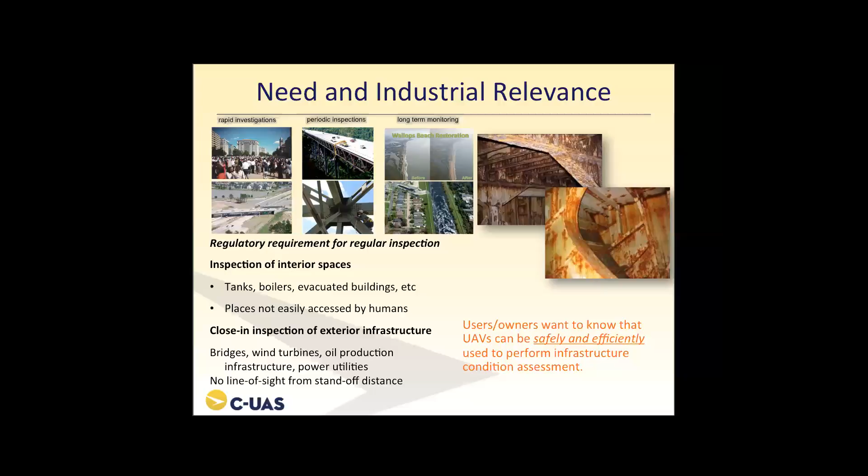And the one that we're focusing on is that the sensors that are actually recording the information that we need to develop and evaluate the condition of infrastructure are also enabled, or they become more effective. And I'll explain that a little bit later in the presentation.

which Dan Stilwell's master's student, Ben Straub, is going to talk about. That's his focus during his master's research, on the indoor, and then also documenting disturbances on the outdoor environment, and how those disturbances influence or how we can deal with those disturbances in a flight control setting.

And so I would say that if we're thinking about the commercial solution, as I emphasized, the commercial solution for this is ultra-reliable unmanned aircraft infrastructure assessment platforms that companies like Stantec or any of the other IAB members would want to offer and sell to this multi-billion-dollar inspection industry in the U.S.

So our technical approach - the equipment that we have is generously provided by Dan Stilwell. He was the one who already had these two unmanned aircraft in his lab and had already been working with them. And so these are the two guys that we're playing with in this project.

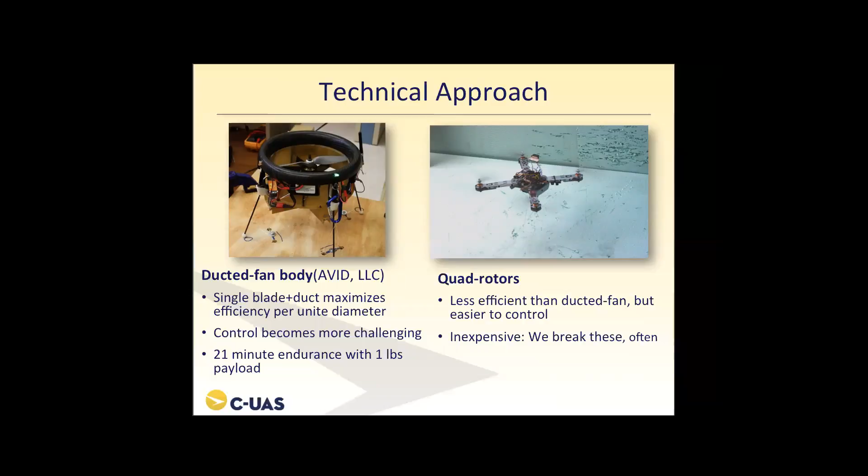Our year one goals are really very simple and straightforward. We want to demonstrate that we can implement robust autopilot with disturbances near a wall or near a ceiling in an opening in an indoor environment, and that we can handle disturbances and hold position at the exterior of a bridge.

So we're going to present first now on Ben Straub's work on the indoor inspection with the ducted fan, and then I'll talk about the plan for the research field excursion to this Wolf Creek Bridge. This is a bridge in Southwest Virginia, where we're going to give our first attempt at some semi-autonomous flight with the quadcopter for the outdoor inspection.

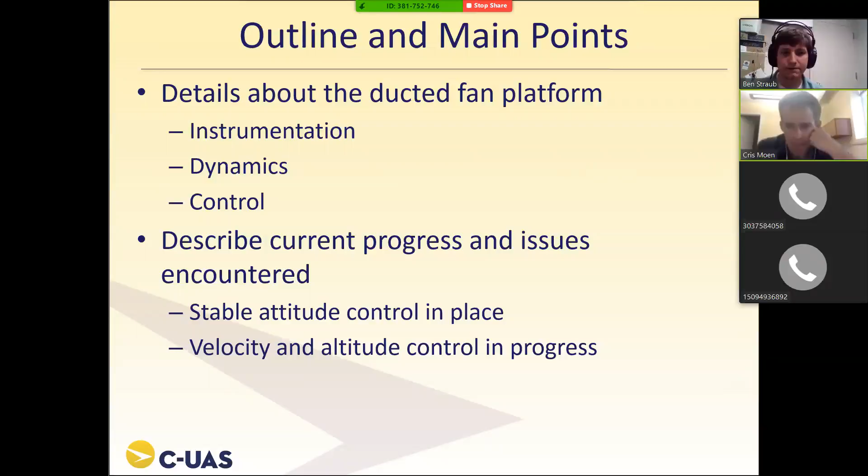So why does this matter? How is this going towards our goal of indoor inspection? The high level steps towards indoor inspection we see are: start out with some kind of orthodox, traditional approach with traditional instrumentation. Then from that, you build on additional instrumentation, maybe proximity sensors or distance sensors to sense a wall, or some kind of sensor that gives us an idea of disturbances around us, or just some stochastic description of our current state. And then from there you build up into the agile control we're envisioning.

And that's what we're trying to really nail down right now with the ducted fan to get working well. We've played around with some of the additional instrumentation, but this is the main focus right now.

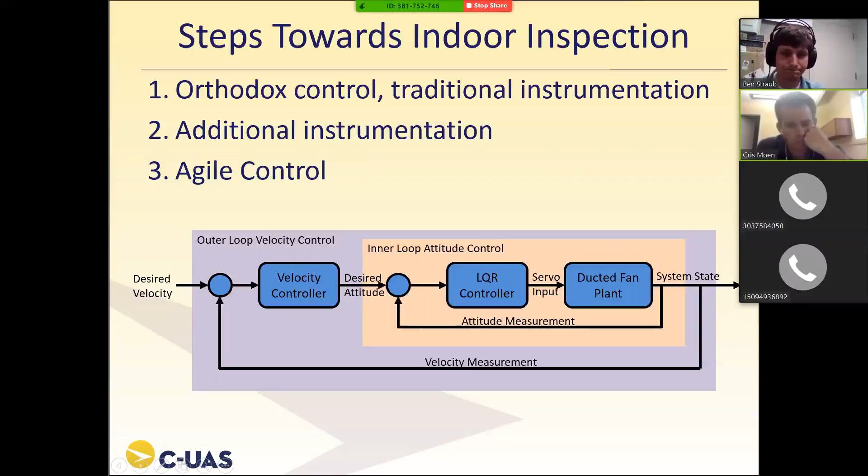So here's the actual ducted fan platform - here's a nice picture of it. The idea is that there's a single propeller or rotor, and then there are four servo flaps underneath that redirect that airflow to maintain the attitude.

Here's a list of the sensors and instrumentation we have on it right now. The main one is the Attitude and Heading Reference System, or AHRS. That measures angular rates, linear acceleration, and magnetic field strength. From those measurements, it'll also give us an estimated attitude and heading.

We have an optical flow sensor that is basically a camera that looks down, and it also has an ultrasonic rangefinder on it to get an altitude measurement. Using that, it'll look from one frame of a picture to another, and estimate a horizontal X and Y velocity, where X and Y are defined in the horizontal plane and Z is down.

We also have some infrared distance sensors - one mounted facing down to give us another altitude estimate, but we can also put others around the edge. We've done some testing with this for sensing walls or obstacles nearby. I've also included the electronic speed controller on this list because we get RPM feedback from that, so it tells us exactly how fast the propeller is spinning.

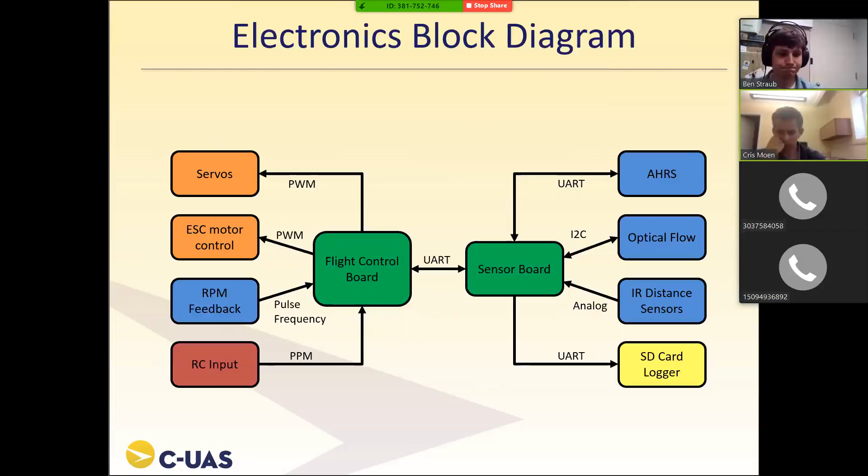Going into some issues we've seen so far, the big one has been issues related to vibration. This is our AHRS sensor, and we've had a lot of issues with it. Internally it has an extended Kalman filter that takes all its measurements and estimates the attitude. This particular brand of AHRS has a proprietary algorithm that attempts to tune the parameters of that EKF, tuning uncertainties and things like that. Turns out it does not behave well under the profile of vibrations we see, and that was causing a lot of issues.

This graph, I recorded while holding the chassis on the ground and then ramping up the propeller. You'd expect the roll, pitch, and yaw to all stay at 0 degrees. But because of the broken tuning issue, you can see the roll in blue drifting off to like 30 degrees or worse. That's pretty bad. Another issue you can see in this graph is the acceleration and angular rates experiencing really high amplitude noise, which is also an issue for control.

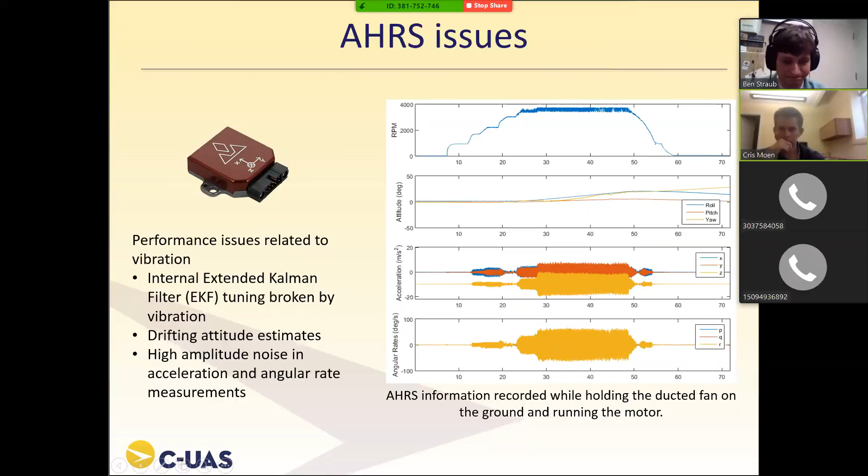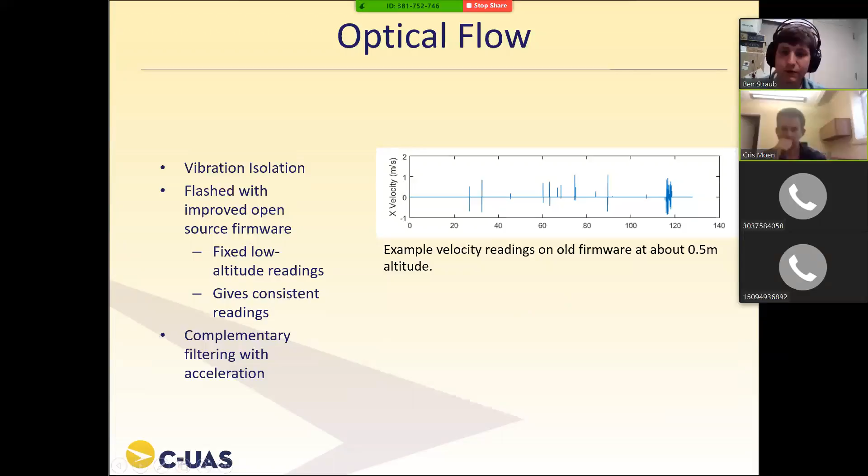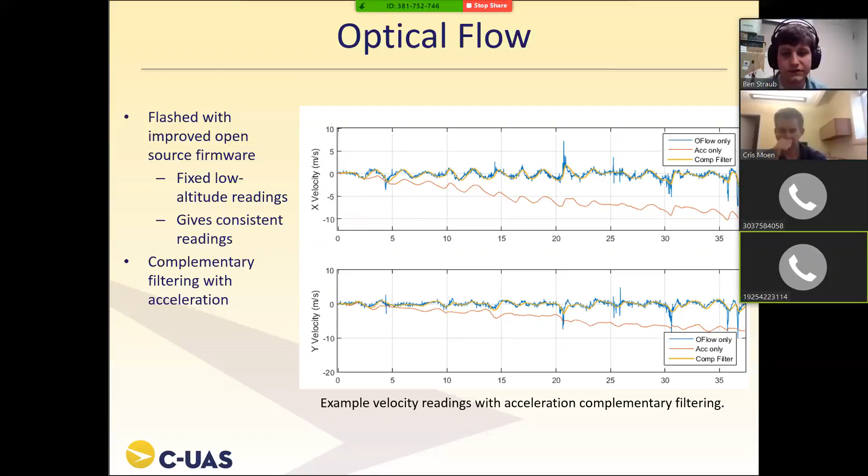We did a similar sort of thing with the altitude. First, we had several different sensors that gave us an estimate of altitude: the IR sensor facing downward, the sonar sensor also facing downward, which gives us a further range but a bit of a noisier estimate, and then we also have a barometer measurement, which is not very accurate but obviously can go much higher - it doesn't have to be pointed at the ground or anything.

So first off, we just combine all three of those based on different thresholds. Each sensor has a certain operating range that it performs best at, at least for the IR and the sonar. Depending on how high we think we are, we weight one more heavily than the other, or sometimes just completely ignore a certain sensor if it's outside of its ideal operating range.

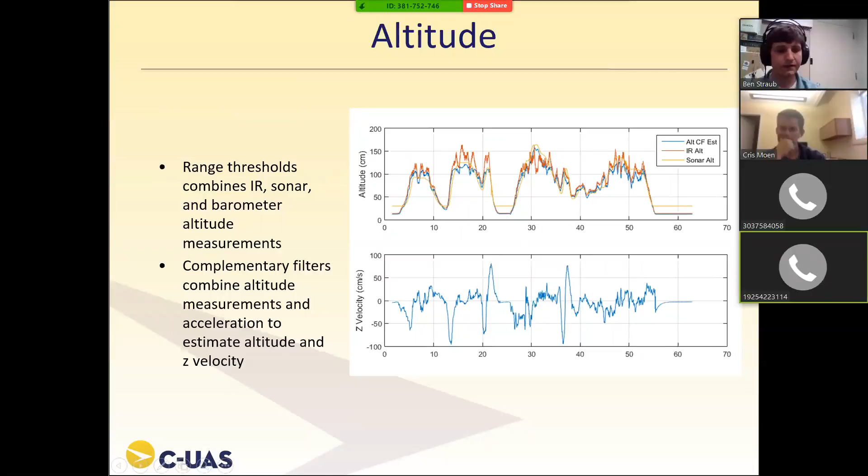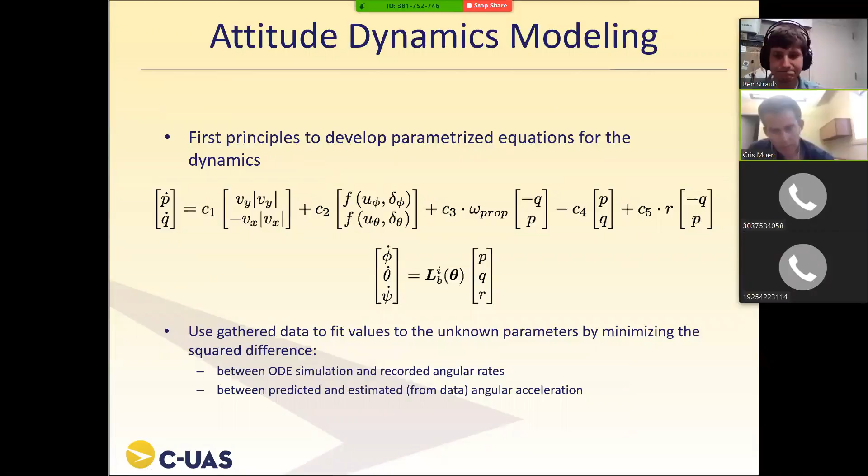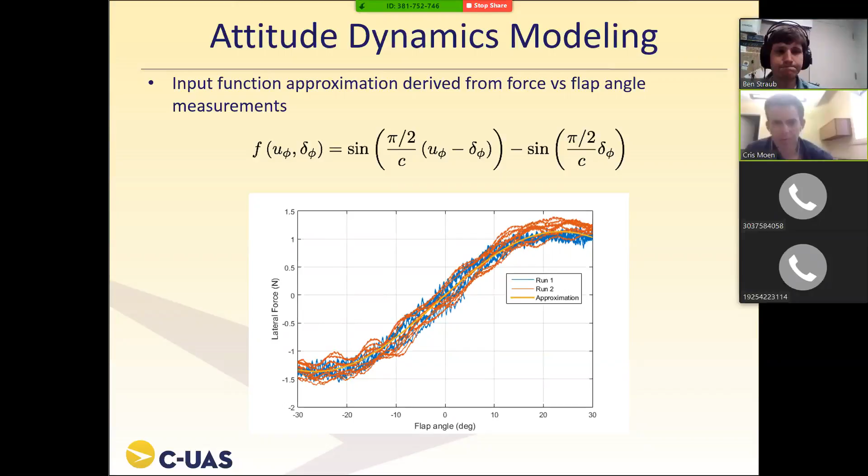I was just trying to figure out, where's that force coming from? Is that the wind force, an external force, or a force generated by the system? So as the motor pushes air through the duct, it hits the servos, it hits the flaps, and if the flaps are at an angle, the air bounces off and causes a force in the other direction. So it's a propulsion force. Okay, got it.

So to come up with a controller for this, the first thing was to linearize the attitude dynamics. The equations I had earlier were nonlinear, so I had to linearize about some equilibrium operating position, which was just upright, hover kind of mode.

Also with that function of input, I went ahead and used the transformed input, treating this whole equation as a new input, V. So when I'm calculating the control values on the controller, it calculates in this transformed space, then does the inverse of that sinusoidal function to transform that back to what the actual servo value should be.

The actual controller design is LQR, linear quadratic regulator. This is a controller design where you give it the linearized dynamics and specify some kind of weighting on how much you value, like weights on the inputs and weights on the states.

If you value roll and pitch more than yaw, you can specify that. After you give it all the weights, it comes up with an optimal controller design that will attempt to minimize those weighted values.

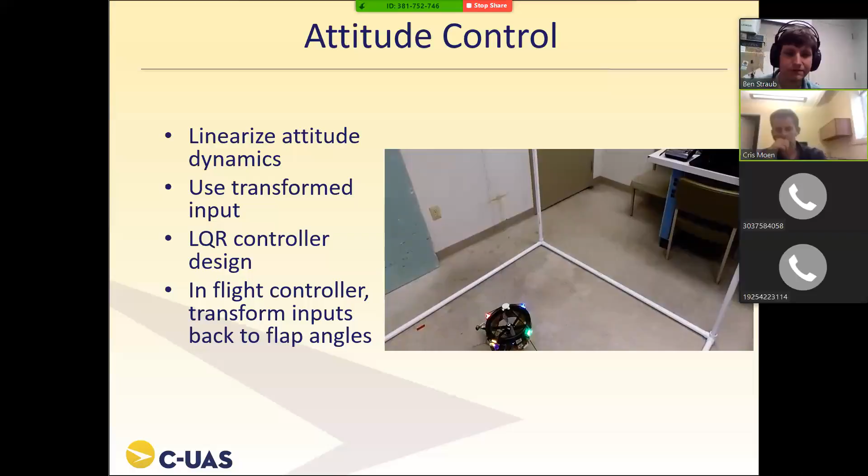I don't have altitude control running here either, and so I'm trying to lift it up off of its tether, like it's tied to a point up towards the ceiling. As I lift it off, once it starts to lift up, I'll try to turn the RPM down a little bit, and then it will kind of fall sometimes. So you'll see some of that too. But all in all, it looks pretty good.

But Ben, the attitude, you said it was attitude control only, right? You were trying to maintain a certain... So yeah, just to maintain zero angle, I guess. Yes, okay, zero. So you want zero angle. Except I was also manually controlling what the desired angle was during that, so if I'm holding left on the joystick, it may be trying to maintain some negative roll angle or something.

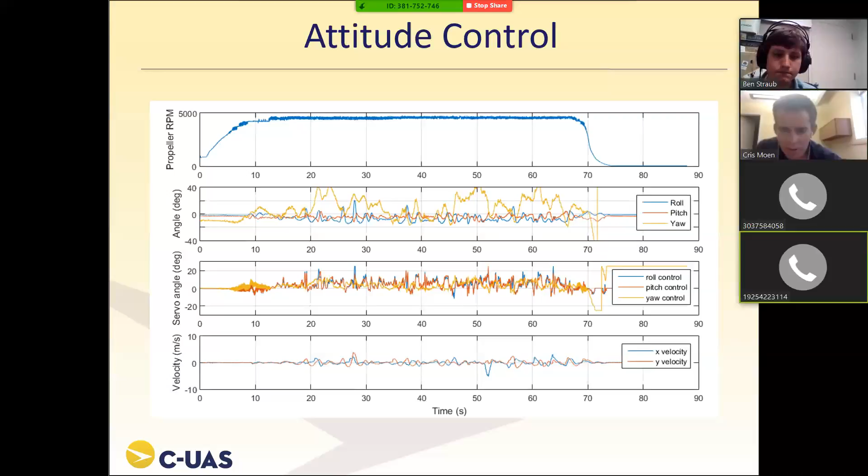Some of the other things I'm working on, I already have - I've shown you the altitude measurements and the filtering estimates of that, so I've got that in working. I've already implemented an outer loop, basic PID control around that to command propeller speed. That's already been implemented and tested a little bit, but it needs more tuning right now because it's just difficult with space constraints. I don't have a lot of wiggle room to move it up and down in a limited space.

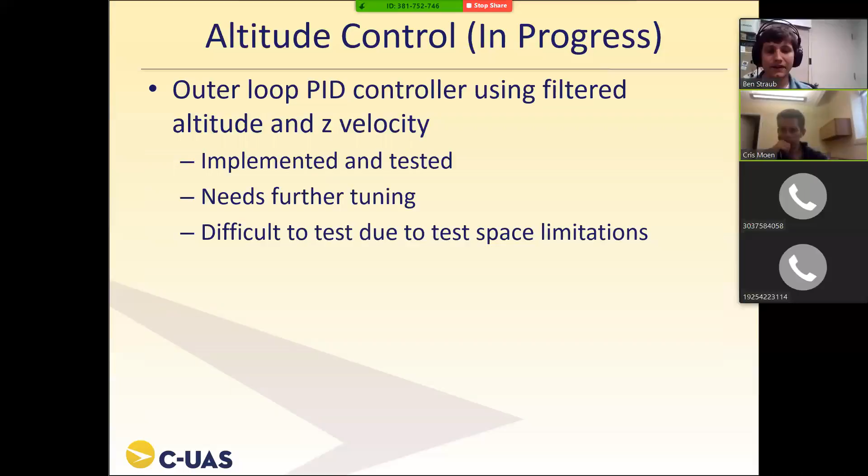Position and velocity control is still in progress. Again, I already have outer loop PID control that will command an attitude to the inner loop, and I'm using those filtered velocity estimates I showed you. Right now it'll kind of maintain its place a little bit, but it's really wiggly, it'll go back and forth. So I think that just needs more tuning.

Ben, how did you address the non-minimum phase from the tilt sensors? It looks like you have the sensors below the CG, right, and you're using linear control methods, but you didn't mention any issues with that. Are you talking about the attitude sensors? Yes. I mean, I haven't had issues with that.

Well, good. Let me put it this way, we have a lot of similar issues to resolve that you seem to be resolving, including the lack of space, and we use professional terms like wiggliness as well.

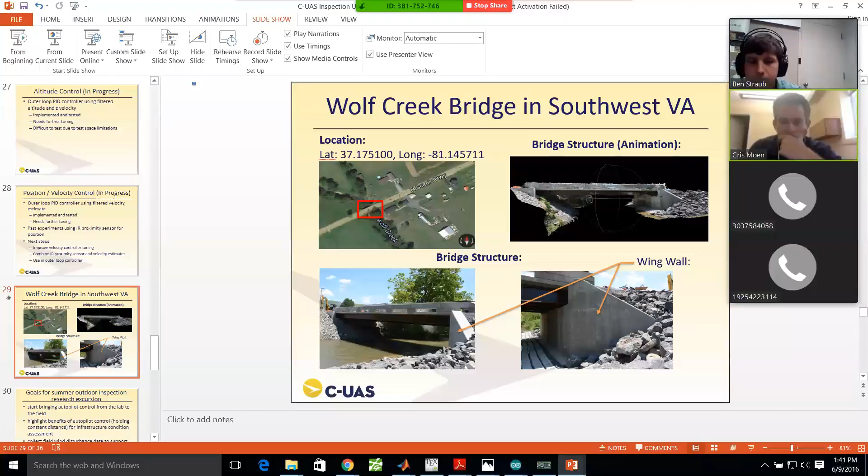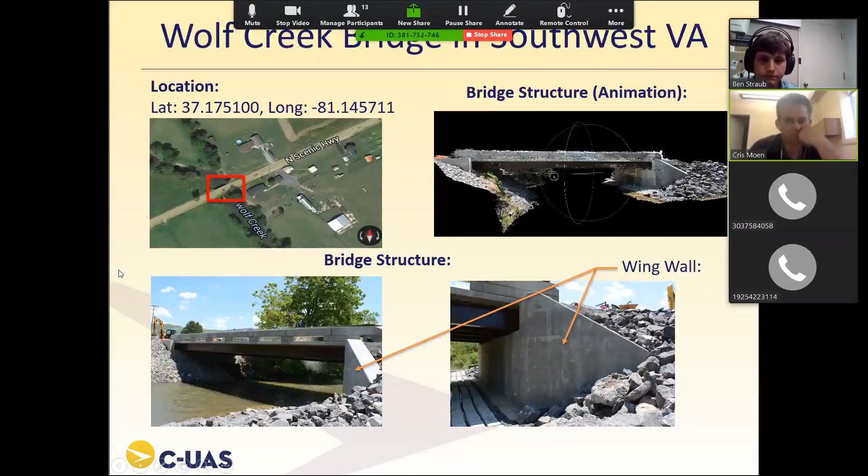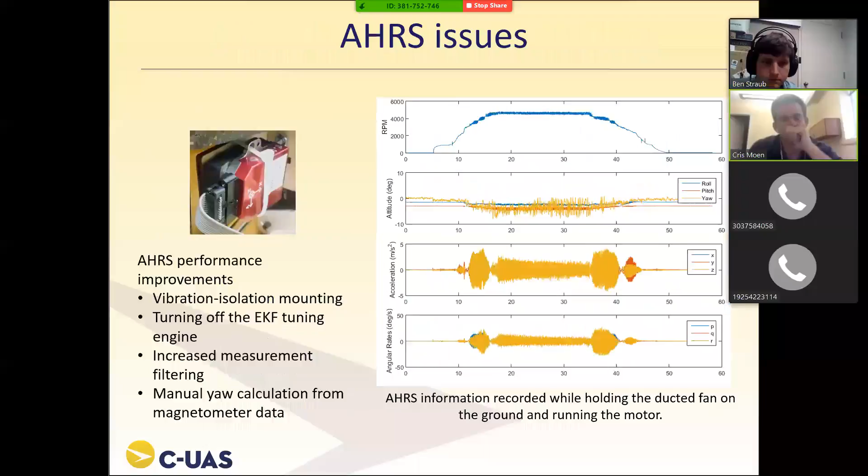When we send staff into a steel box girder to look at welds, we're usually stationary for a while - we crawl through a diaphragm, sit down inside the box, and start inspecting the welds. It seems like that ducted fan, the way it's moving around, I'm not so sure it needs to be flying the whole time. Why can't it fly through the diaphragm or the hole, go in there, sit itself down, and then you have a 360-degree camera mounted on it, or a camera with a gimbal that does 360 degrees and up, down, left and right, and you start scanning the inside of the box from there. Then when you need to look somewhere else, you fly it to another location. So you're using the flight to move yourself through the box, but it may not necessarily need to be flying the whole time, is my point.

Yeah, that may be a good point. You can see this mount in the picture here that we're leaving to mount a camera or something, so it would be pretty easy to put something like a 360-degree camera or a gimbal mount that can spin around. So that's a good point.

To Ryan's point also, in terms of sitting it down at a specific point on the bridge, not necessarily—we're not going to have a floor for this to land on underneath the bridge all the time. One thing I was thinking is that if you could somehow activate a magnet, if you have a steel bridge, this could attach to the web of a girder and run that 360-degree camera, then deactivate that magnet the moment you want to start moving again. So that's just an idea also.

That's a cool idea. Well, Leo, the ducted fan is just for going inside confined spaces, I believe Cris said, and then the quad rotor was for doing bridges. So the ducted fan you're seeing here is only for going inside, and I think you would have a floor. Got it. Okay.

Also, I have a question. Ben, you mentioned you have limited test space right now. Is that going to change for you anytime soon, or why do you have a limited test space? So I've been doing all my flight tests in just like a small office kind of thing—there's nobody working in there, but it's what I have to work with right now. There's another professor here who has said I can use his flight lab. He works upstairs from me, but his flight lab isn't ready yet, so hopefully in the somewhat near future I'll be able to use that test space, and it should be a lot more useful.

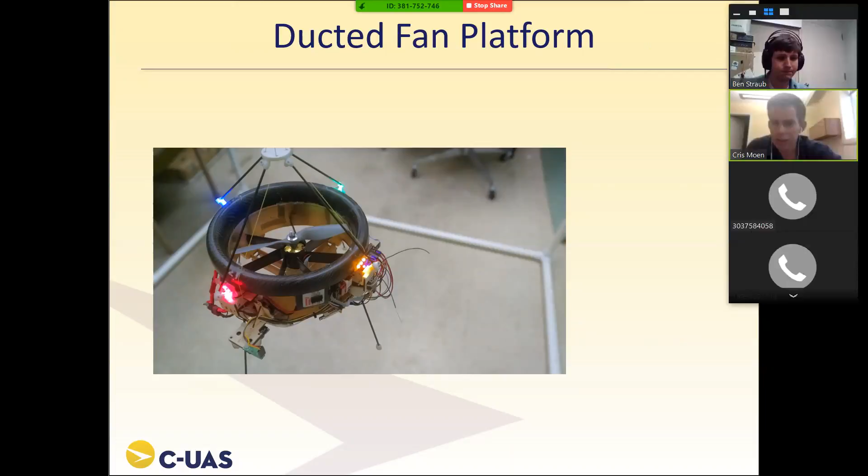Great. Thanks, Ben, that was good stuff. Can you send the host back over to me? I think maybe you're the only one. You just did it? Yes, okay. Yeah, you should be host now. All right, cool. Good job, good job though, that was a good presentation, Ben. Thank you. Yep, thanks.

All right, so you can see that we have a solid team with a lot of expertise in flight control. Definitely a great presentation, Ben. So now what we're trying to do is take some of that out to an actual bridge. We have that bridge, and we're headed out there soon to do some very preliminary—I'm calling it a research excursion—to fly the quadcopter, not Ben's ducted fan, but fly a quadcopter at this bridge and try to measure something.

So we'll do some condition assessment with some autopilot control. This bridge is located in Southwest Virginia. My PhD student and I have worked on it for other reasons, for the Virginia Department of Transportation recently. It was just reconstructed. The cool thing is that it's a pretty rare thing that we get VDOT access to a bridge, and that was the first hurdle that we cleared.

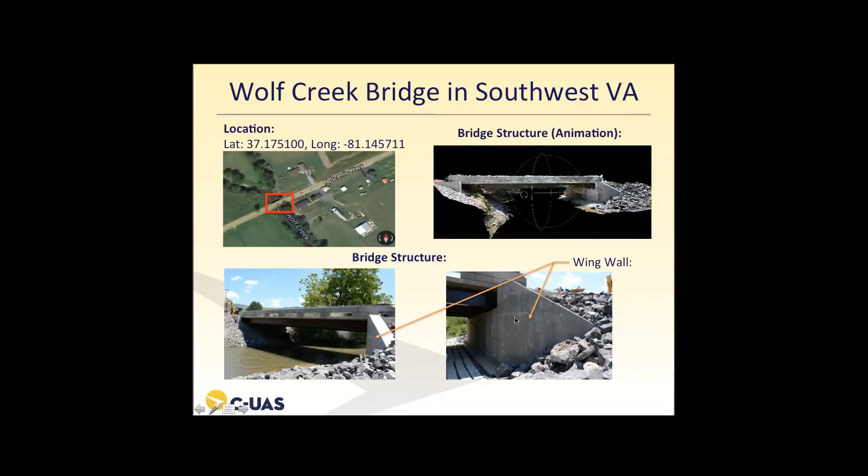Something else I should mention is that the sensor we're going to be flying has the capability to create 3D models of anything, with videos or still images. So when we're flying the unmanned aircraft, we're going to be creating 3D models of portions of this wing wall. That's the integration of the flight control with the sensors.

We have the advantage of DOT interest, and we want to highlight the benefits of autopilot control to them and to the infrastructure community. We also want to collect field wind disturbance data to support our autopilot development, so we're going to be measuring wind speed and direction around the bridge.

We also want to develop relationships, so in this case we're working with the Mid-Atlantic Aviation Partnership to obtain our COA for this project. We wanted to go through the procedure of getting a COA because, at least for me, I'd never done it before.

So it's as simple as this: document the condition of a wing wall with the quadcopter. You'll notice that there are certain features on the wing wall, so we're going to focus on trying to accurately identify and measure a few of these features.

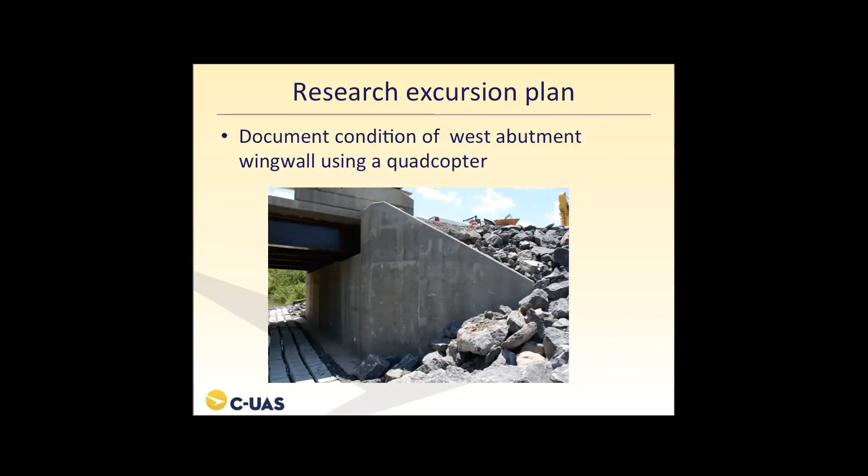So the quadcopter we're using will have GPS and the IR proximity sensor integrated with the autopilot control. We're also installing some Raspberry Pi ribbon camera sensors, 5 megapixel video sensors, that will be collecting the data we can use for measuring the features we're looking at on the wing wall.

I want to emphasize something important. We're trying to keep the experiment simple, but overall, from what I'm seeing in the bridge inspection community using unmanned aircraft, the proximity they can get to the actual bridge is still pretty far, up to 7-8 meters.

The problem with that is they can't get the resolution and detail they want. They want to look for cracks, rust, corrosion, and weird buckling, and it's hard to do that when you're 7 meters away. So a big advantage of this autopilot control is being able to get closer, and that's one of our focuses, to do much better than 7 meters on this wing wall.

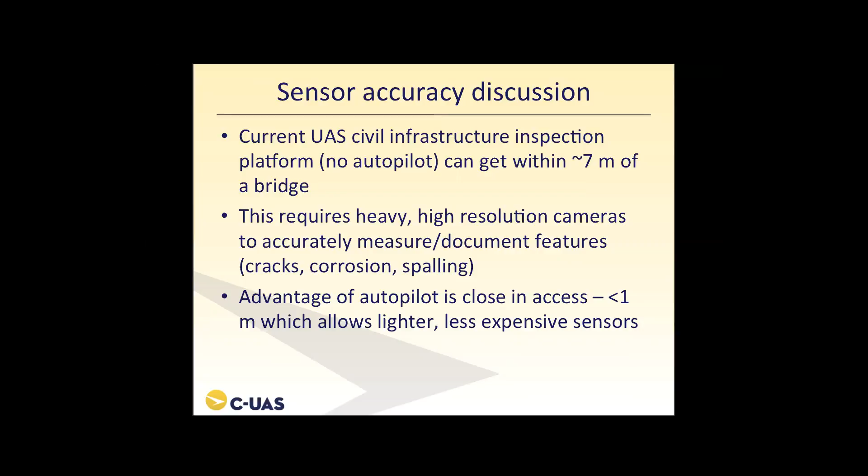I put this in the slide, but maybe we don't need to go over it. It's obvious: if you get closer with the same number of pixels, you have more accuracy in the characterization if you're trying to measure something.

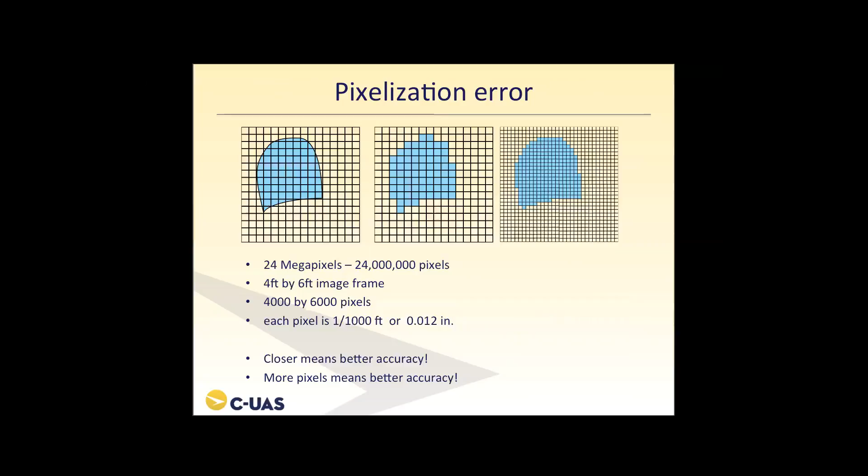But that's why we have the support of the IAB and funds for this project, to start getting out there.

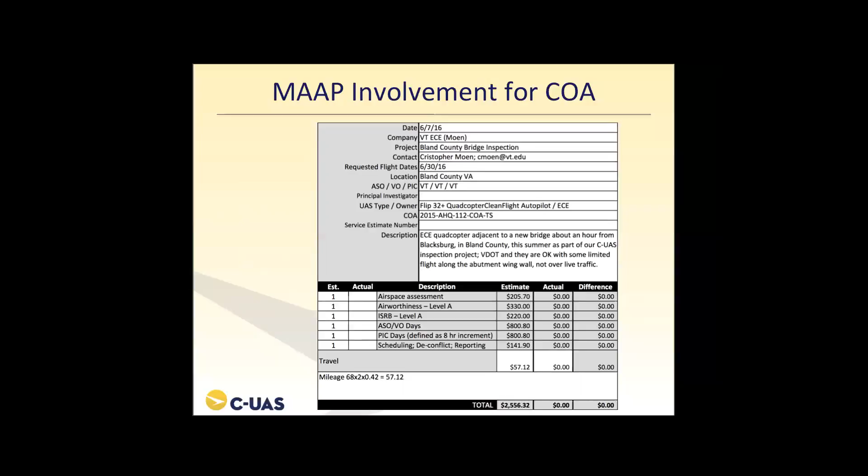The field study is that we're going to be measuring wind speed and direction at a few different locations, thinking about how it varies along the height, identifying 2 or 3 features on the wing wall, carefully documenting those feature characteristics and dimensions, then setting the unmanned aircraft with the GPS location and recording video of the features, along with everything Ben was talking about that it can grab while flying, and also using the IR proximity sensor, setting it like 1 meter from the wall and letting it hold itself there.

We'll take some sensor measurements and evaluate the accuracy of the features one by one. We're looking at this circular feature and this crack, and maybe there's a crack here and something else there. So we're trying to cover a lot of ground: measuring wind and wind disturbance, evaluating flight control with GPS and the proximity sensor, and understanding the influence of all of that on the accuracy of the measurements we want to make for the inspection.

Post-processing, wind models, variation of disturbances along the height, digital state models of the wing wall, and documenting dimensional accuracy, then evaluating stability accuracy of the different autopilot GPS hold and IR proximity hold.

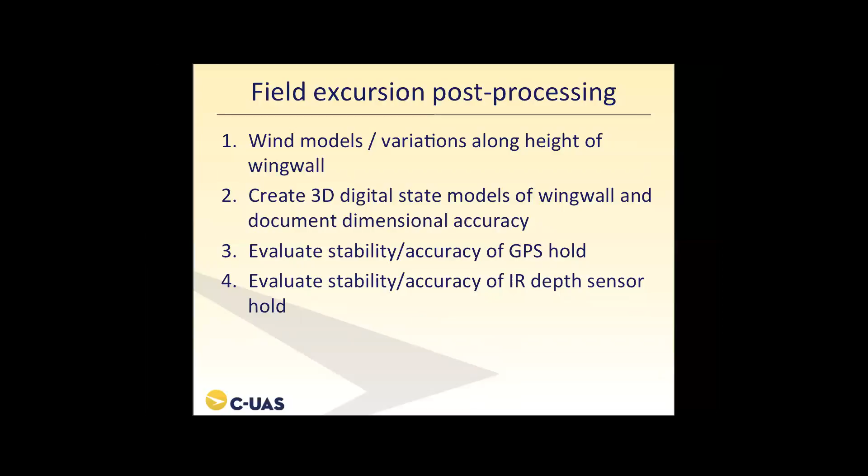The year one deliverables for this project show a lot of progress. We're ready to crank here in the next month to gather outdoor data, and we'll have Ben's thesis advancing indoor autopilot, while the outdoor work will be recorded in a Transportation Research Board paper. This is a conference of 15,000 bridge and infrastructure engineers that come together every January.

In Washington, D.C., this work will be presented there. The third thing we'll be working on in the last half of this year is the wind models. We're going to have a bunch of wind data, and we want to work with Meyer and Craig Woolsey to think about how we can use those wind models to fine-tune the autopilots.

Looking to next year, we've made the first baby step where we've gotten out in the field. We have some wind data, Ben has some nice control algorithms, and we're using proximity sensors. Next year we would love to take the next step and do version 2.0 of the autopilot, maybe with a different DOT that's even more integrated into the process.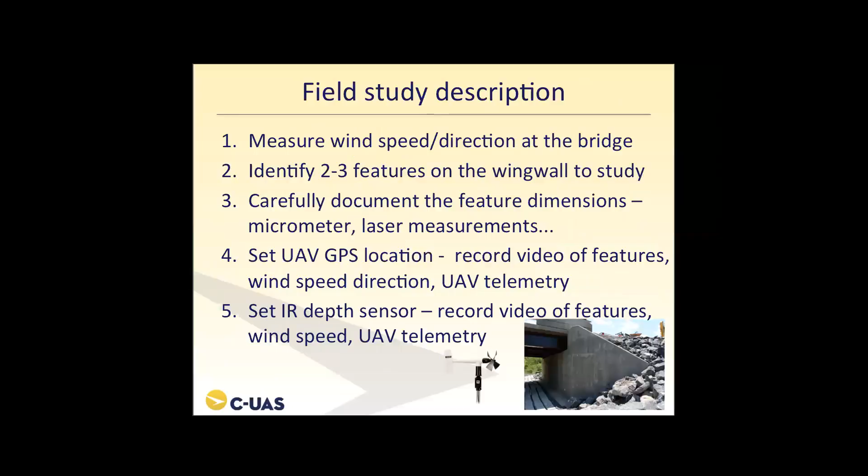Those little holes you're looking at on that piece of plywood are called form ties. Yes, form ties, I knew that back in my days as a bridge engineer, I knew what they were called but it's been a while. Thank you, yeah exactly, thank you.